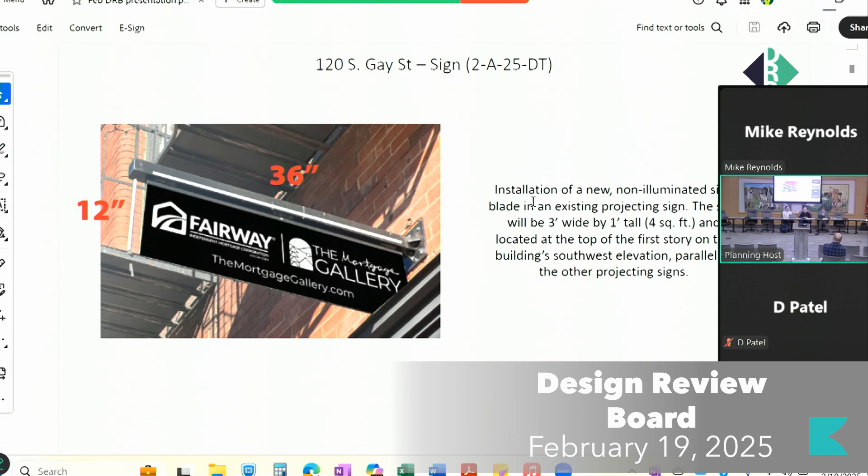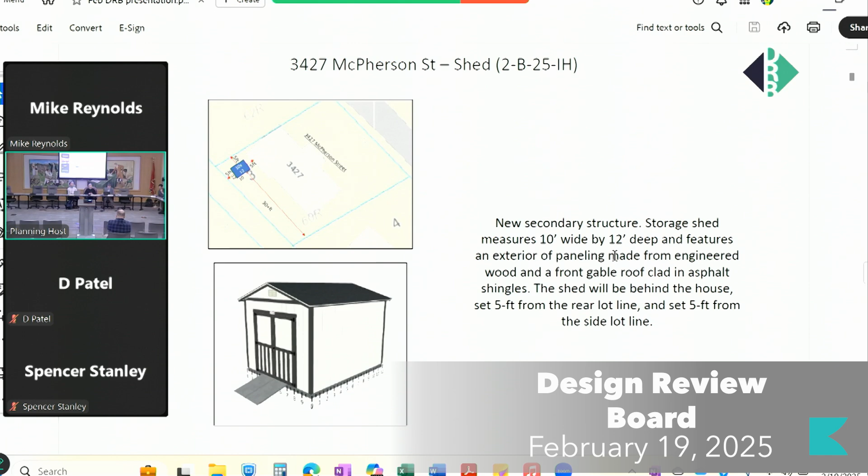The next one is infill housing at 3427 McPherson Street. It's a new secondary structure, a storage shed, 10 feet wide, 12 feet deep. If anybody has any questions, I'll be happy to answer. It's to the rear of the house.

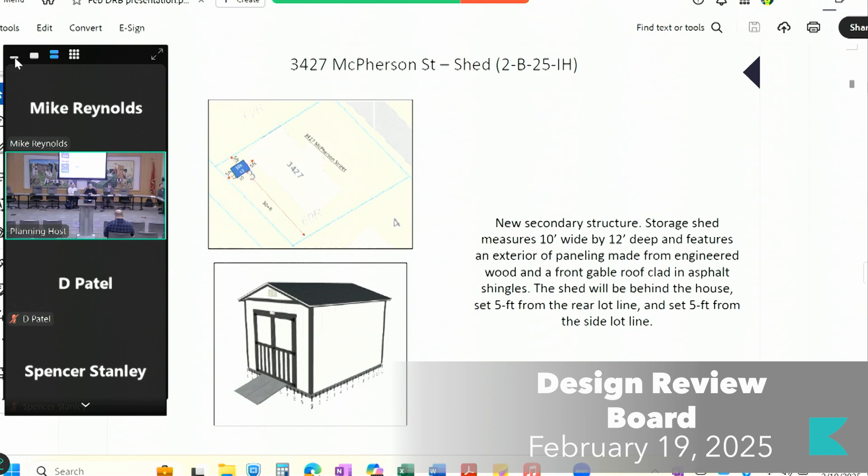And it's going in the wrong direction. My controls are not working well. Yeah, my computer is not responding at all, of course. Hold on. Yeah, I'm not getting... I apologize, my computer has frozen on me. And I don't have the other certificates written down. No.

I think we should just wait, because if we move on, we're going to get into the other projects pretty fast and want to look at them.

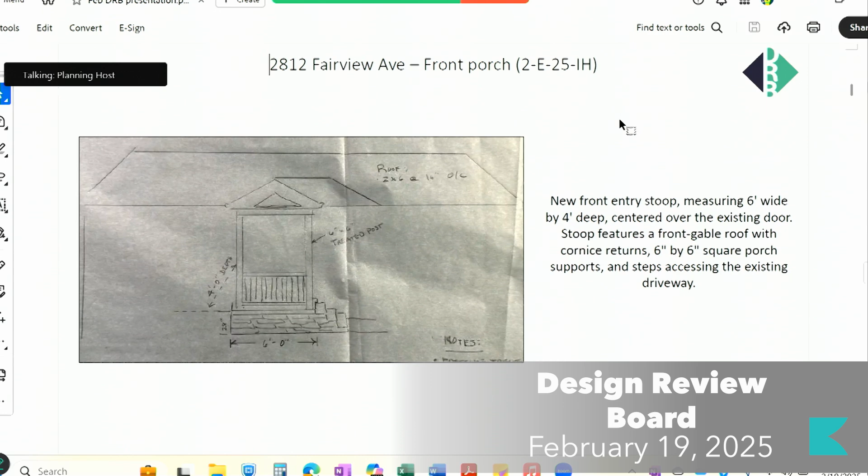2812 Fairview Avenue. It's a front porch addition. It's a new entry stoop measuring 6 feet wide, 4 feet deep, centered over the existing door. Has a gabled roof and 6x6 square porch supports, steps accessing from the existing driveway. Okay, that's it for the staff report.

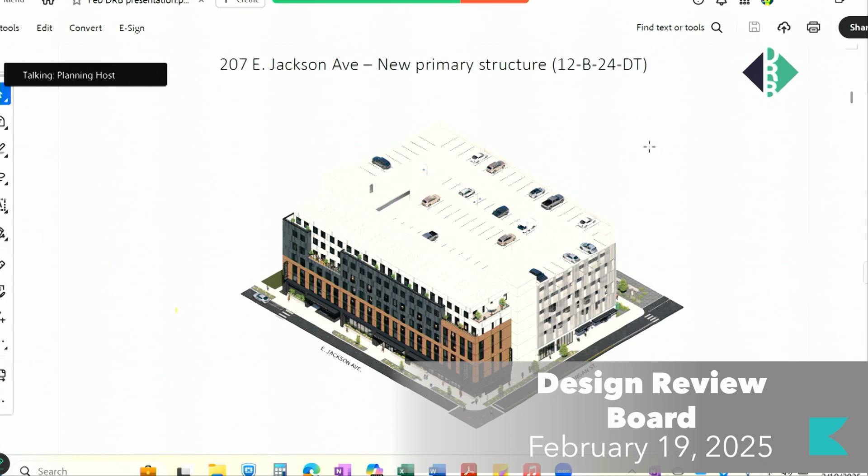All right, thank you. Next up we have certificates of appropriateness for downtown. The first project is 207 East Jackson Avenue, which is case number 12B24DT.

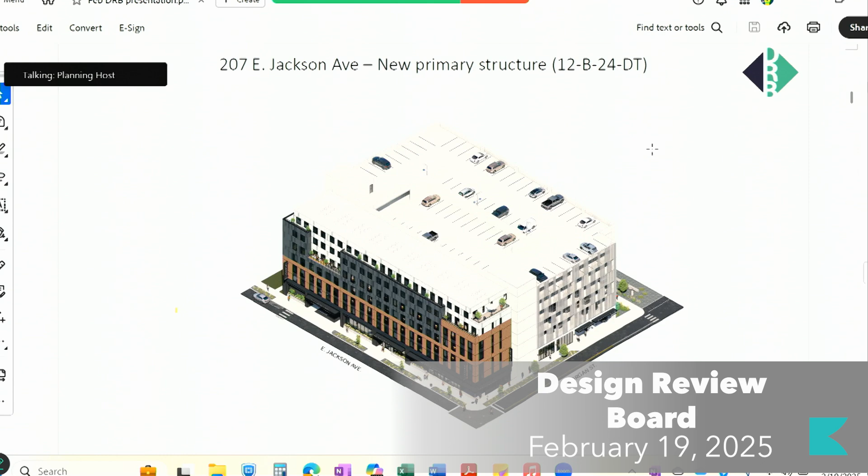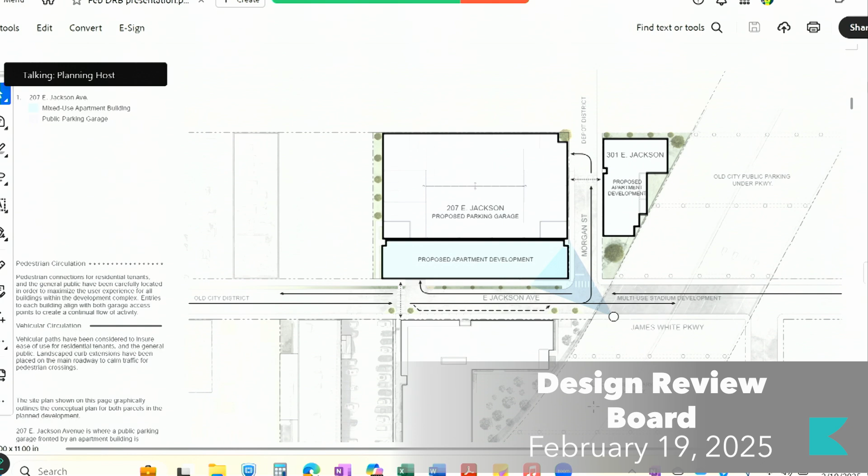All right, I'll try to summarize this pretty quick because it is a big project and we've already been through a workshop, so most people should be familiar with it. This is a proposed new 7-story mixed-use building, 6 stories of residential above 1 story of commercial uses, and also a proposed 7-story board-form concrete structured parking garage. So it is a mixed-use structure with the liner use of residential and commercial along Jackson Avenue. It does have garage access to both Jackson Avenue and Morgan Street, which is a side street. There's 2 pedestrian entrances to the ground level retail space on Jackson Avenue, a second retail access to the Morgan Street elevation, and a residential lobby on Morgan Street as well. The secondary access to the parking garage is to the rear elevation. I don't know why it keeps going backwards on me.

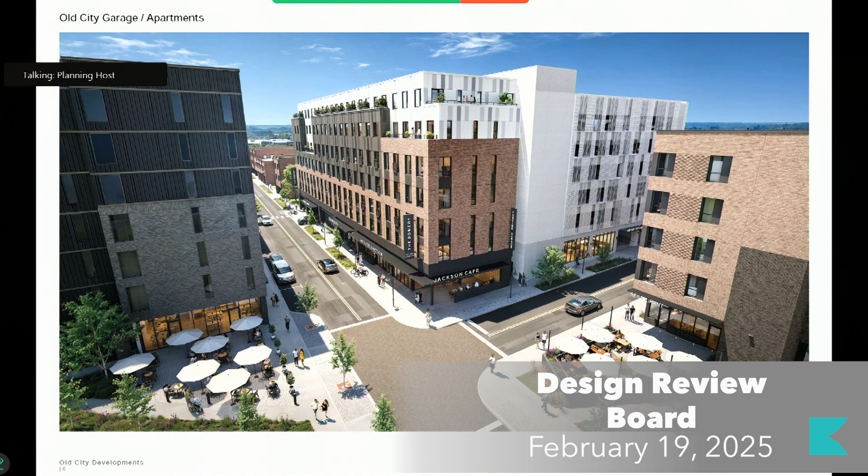Design guideline recommendations talk about parking, consolidating curb cuts, and locating driveways near mid-block when necessary to prioritize pedestrian safety. They recommend locating parking garages under structures or providing retail, residential, or other office uses to line the garage, and avoiding blank walls.

On massing and scale, they recommend maintaining a pedestrian scaled environment from block to block, along with dividing buildings into modules. Guidelines encourage incorporating first floor uses that are open to pedestrians and draw in walk-in traffic.

Building materials should relate to the scale, durability, color, and texture of predominant building materials in the area. Mechanical equipment should be hidden. For signs, there's not enough information in this package to approve a sign plan, so that will have to come back at a later date. Any major modifications will have to come back to the board, as noted on the plans.

These are still kind of preliminary. So staff will flip through some of this imagery.

We can open it up for discussion, but staff recommendation is for the final site plan and parking garage to meet city engineering standards, final elevation drawings to meet relevant standards of the city zoning code, including Article 5.4, and for signage to return to DRB as a separate application.

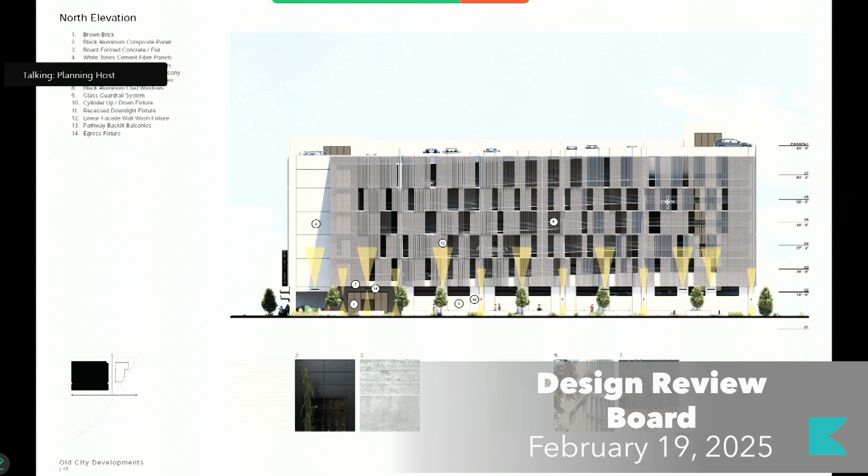Could we talk about the Morgan Street elevation? On the ground level there's a storefront, but in the plan it's not labeled as a use. What's that near the north of the stair tower going to be used for? Is that leftover retail space? Yes, it's intended to be retail space.

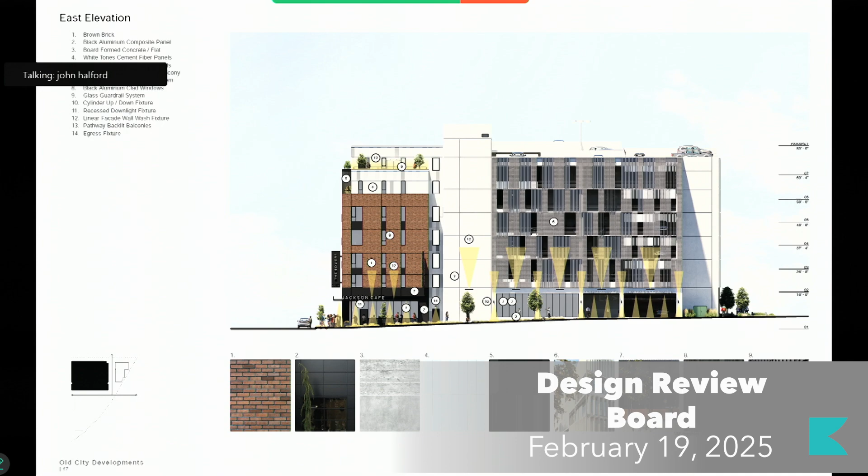Alternatively, it could be an amenity space for the residential, but our goal is for that to be public facing, so the highest and best use would be retail. If it were anything tenant facing, it would maybe be an amenity.

It could be like a bike shop that was used by the tenants, but also available for the public as a service. So the goal is for it to be public facing. That came in part through some of the comments we received from the workshop to work in more retail along Morgan Street.

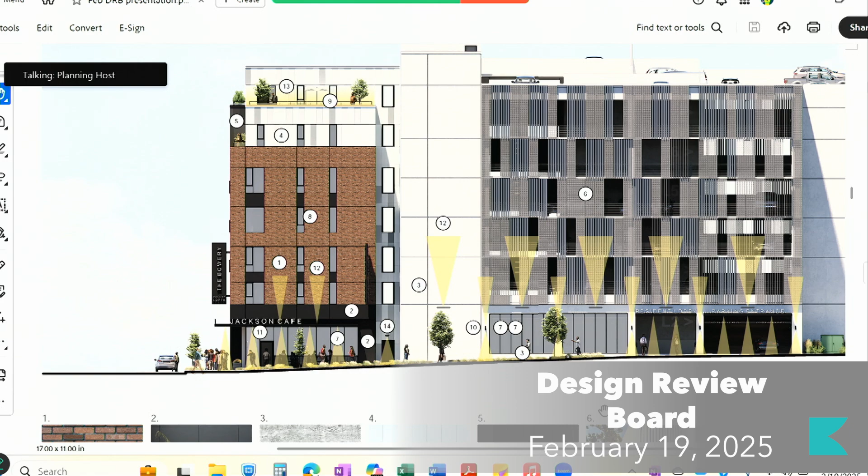I think going off of that same conversation, the blank wall of the stair tower coming down is listed as board form concrete, but then it says flat. Is this actually going to be board form with the texture of board form, or just regular blank concrete on that elevation? Our goal is to actually do a texture overlay on top of that, like a hand troweled finish, so that it can be a decent texture on that concrete face on that stair tower.

For the design, we thought that because these two building forms are relatively different, having that break visually kind of helps with the overall massing, so I think it's serving that purpose. But in terms of the actual material and finish, we want some texture to it, but otherwise it's going to be a natural concrete color.

Is there anything about our guidelines that says a blank wall is not allowed for that expanse? It talks about not having blank walls, but there's nothing explicit in the guidelines. The zoning ordinance has some blank wall standards. I'm not sure if this would apply. Article 5.5, Table 5.4 does mention all street-facing facades must not contain blank wall areas that exceed 35 feet. So that'd be out of the zoning code.

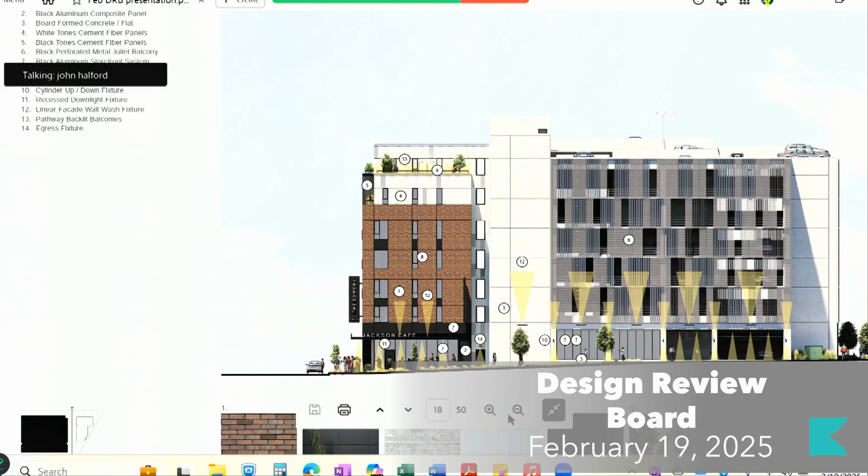Also, could you all explain the screening material on the garage portion a little bit more, like what it actually would be? There's a substructure to it that mounts modular screening systems. We've talked to some suppliers and manufacturers, including opening up discussions with local metal manufacturers that could pull this off. The goal is those modules would be made out of a handful of different panels, some being made out of fins, like louvers that could be rotated to create some openness and visual interest along the facade.

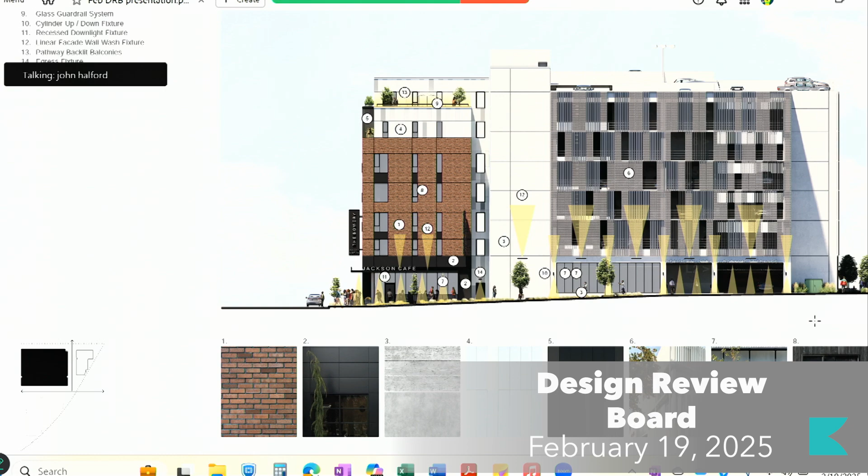If you're standing at the corner of Morgan and Jackson, we're creating views, some openness where we think it is a good texture and pattern on the facade from this vantage point. If you stand on the opposite side, that starts to change because the direction of the louvers changes based on where you're standing. There are also more simple perforated metal panels mixed into that, as well as some leave-outs to hit a few requirements we have—one was visual interest, and we also wanted to tie this into what we were doing on the Jackson facing facade on the south, on the upper levels.

But we are needing to meet our requirements to passively ventilate the garage, and so some of that openness is based on those calculations. Yeah, thank you, that makes sense. You don't want to have to introduce mechanical ventilation.

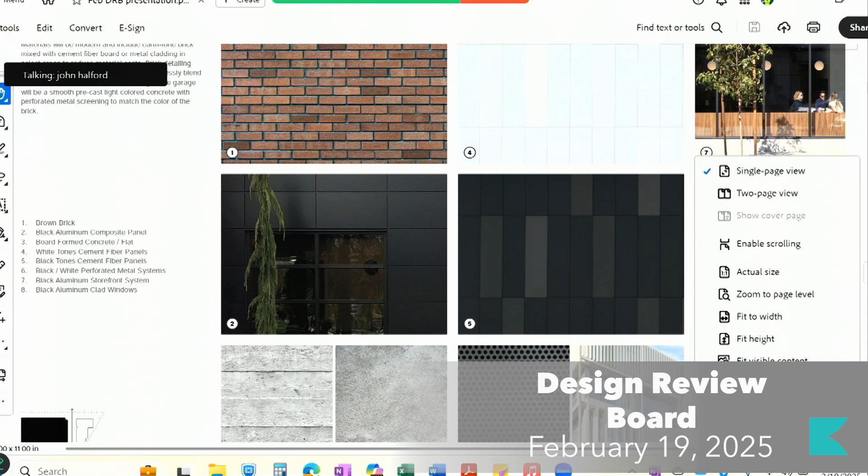I had a couple of comments on the Morgan Street side, with that space we're referring to next to the stair tower, toward the parking garage part. At one point I thought I'd heard that was going to be the residential lobby, and I heard it might be a residential amenity like bicycle parking or a shop that would serve the residential. I noticed on the plan it does not open to the street at all, that the doors to that space are interior to the parking garage, which when I heard residential service or lobby, made more sense in that regard.

Before it slips my mind, Rick had mentioned too about our parking lot screening, whether it should continue up to a parapet level so we don't see cars on the roof, realizing when you're standing on the ground looking up you may not see them. You have to get some distance back since we never really see a building in elevation. But that's a good point, you might want to continue your parking screening up a little to obscure vehicles parked along the edge on the roof. Anyway, my primary comment was about that corner space down there off of the parking garage.

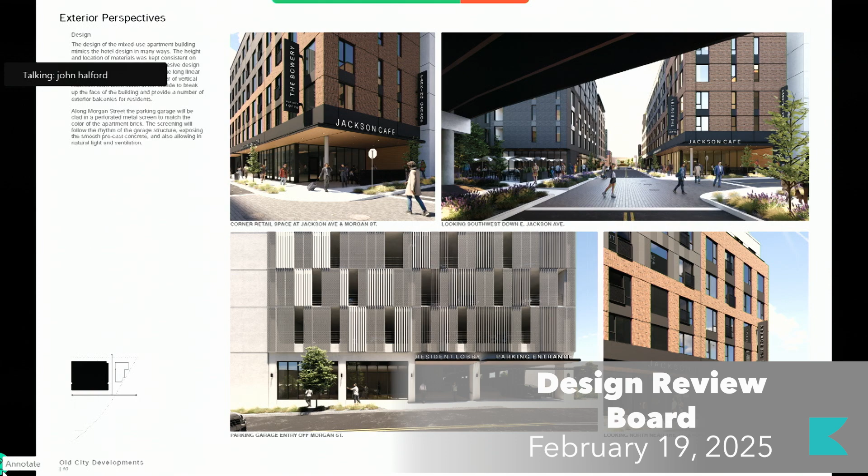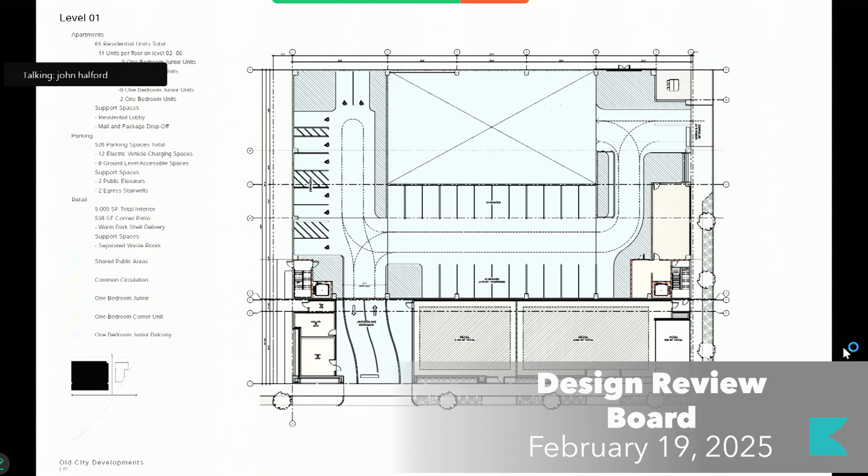If you look at the plan on the ground floor, that retail space, plan north of that, there's a hatched area, about 18 feet or so. That is actually the primary pedestrian exit from the garage, and we're trying to funnel people to a couple of locations. They can go down the stairs and kind of cheat to get out to the intersection more quickly. But because of the grade change along Morgan, it's most efficient for everyone to move with the fewest number of steps. So we're putting people out there. That actually is not an insignificant public entry at the northeast corner of that, quote unquote, retail space.

Again, we don't know exactly how it's going to be programmed at this time. It could be a public use, but also amenity use, but there is public access. If you look just plan north, those are just a few steps that access off to the Morgan Street sidewalk, and then that grade slopes down towards the intersection of Morgan and East Jackson.

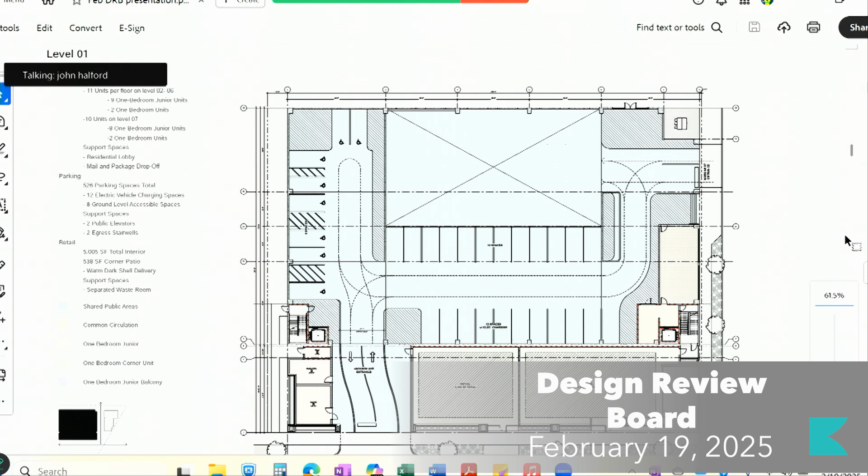In terms of the elevation and the height, we'd certainly be open to conversation and input. I think for us, we were mainly looking at that height from the ground, and you can see in those renderings you're not going to be able to see the cars, but we were also working on striking a datum. You can see that aligns with some of the score joints in our elevation, so we were pulling from that. That said, if that's something the design review board feels strongly about, we can certainly explore pushing that up to provide further screening, or to provide sightline studies to show there won't be any views to cars parked on the rooftop.

Just going to apologize real quick, my computer is acting up again, so hopefully I'll get it back up in a moment.

I wanted to close the loop on that comment from Perry. Just to confirm, that retail, quote unquote, as you said, is never going to have out-facing doors to the street because the grade change doesn't allow on-grade access. It'll have to have the stair set adjacent to it. Judging from the hesitancy when you explain it, it's not going to be retail, it'll be an amenity space for the tenants. I guess really the spirit of it is they're trying to have activity on the street and eyes on the street on those sections, and not just long expanses of non-activity.

So that's why we keep asking about it. I know because of that, no one will want to go to it, it's really just not going to have action on that side. So that's the reason why we keep bringing that up. So just to make that into a question, that face will never have storefront doors opening to the exterior?

On this side of the street, the storefront doors opening to the exterior open into a large 20-foot by 20-foot covered area accessible immediately off of Morgan. So as long as we're on the same page that it's very publicly accessible from Morgan, then yes.

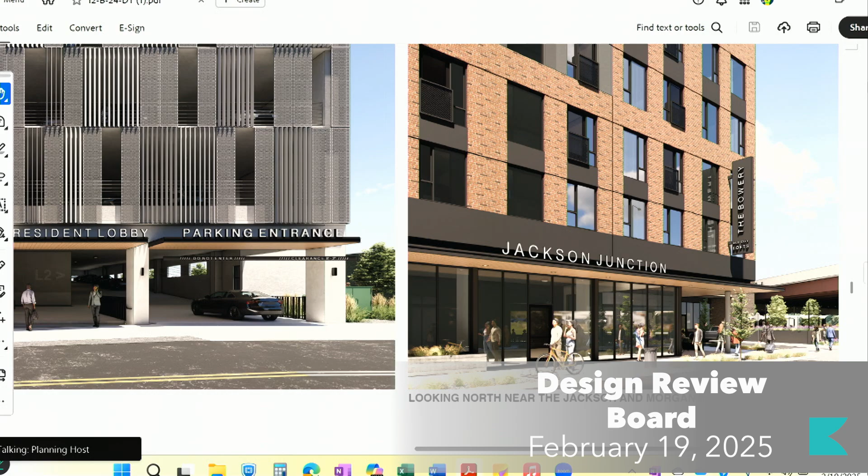Yeah, I guess now that I'm really understanding that material, I wish there was one less material on that facade, because the base of metal, brick, fiber cement one color, fiber cement another color - I think the 2/3, 1/3 proportion with the base being heavier with the brick may have been okay.

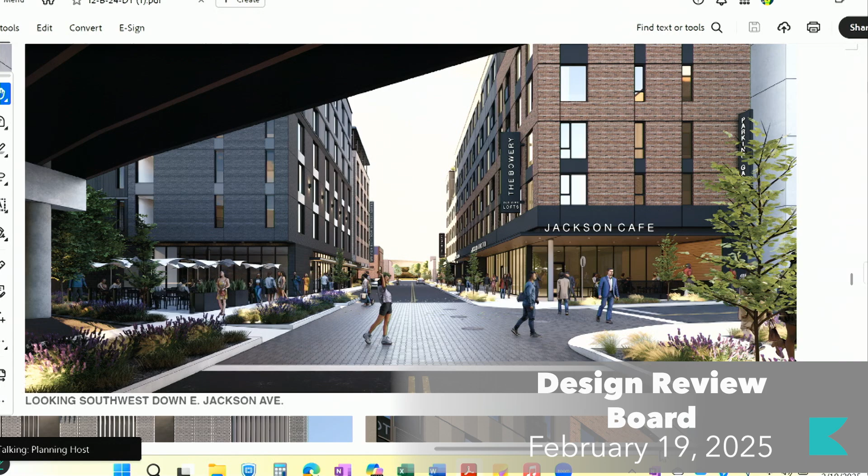I understand it doesn't have full brick going to the ground because it'd be broken up by the glazing, but the scale of that band from the top of the awning to the underside of the glazing, that strip of ACM is really thick and seems out of scale proportion. I know what it is - it's the same gap that's floor to floor. It's determined by that. I think it would be better served to be thinner, with more brick coming down, because that head of metal above the awning is just really big, and I think it's complicating the facade a little bit too much.

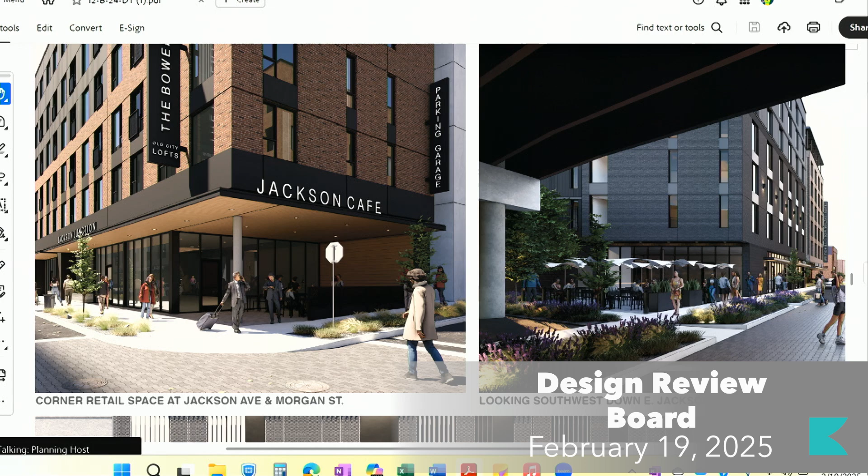I have a little bit of concern that if it gets too much thinner it'll look kind of weak, because there's that banding that happens at the other floor-to-floor levels horizontally, and if it becomes too thin... Maybe I want it to be so thin that it'll just go away. So that's a different thing - it was a facetious endeavor.

Last thing, I do agree also with Tony. I understand your concern about the buildup of dirt on these ledges if you have too many pushes and pulls, but the material transitions are extremely important, because it'll look really flat between them if not done well. I appreciate Tony's comment about maybe a row lock at the top of the brick - I don't want a traditional row lock, but something that breaks up that striation of material with good detailing so it doesn't read as flat, just like the reveals and detailing at the fiber cement.

Okay, sorry, I dropped out for a second. I was about to say - I feel like his lack of response might mean that his connection ended. Yeah, no, I was... through my computer. No, I'm kidding.

So I think I picked up everything that was stated. We were just talking about row lock or brick detailing at the top of the brick - that's what we were really talking about, just all of the material transitions. You said it was a design intent to make them coplanar.

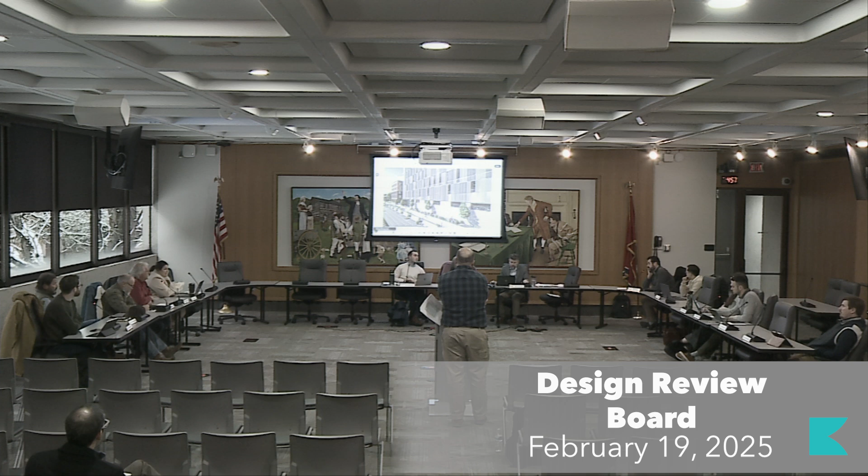The sidewalk is not on our site. That's right of way, so it'd be some sort of city project. Well, but the building would then have to react to it in a proper way.

Is that a known condition, or is that still in flux right now? Yeah, I don't have any information on that right now. Do we know if the railroad has an easement, or does the railroad own that land? It's shown as right of way, so it should be railroad property. I guess what I mean is, does the railroad have an easement, or does the railroad own that property?

Usually the right-of-way is owned by the railway, typically. Well, there's a lot of laws that govern how that works. I'm just curious, because if the railroad has an easement, it'll have a very hard time putting a sidewalk there. If it owns the land, then they can put a sidewalk there. Even if they cooperate with the city, federal law doesn't allow them to just modify the use of that land.

My general impression is we weren't necessarily approving the sidewalk on Jackson either, that it's a response to future public improvement. So if the city's pushing for a greenway along the railroad right of way, that may or may not happen. I don't know that that's part of what we'd be approving today.

I guess what I'm saying is the back should be approved contingent that the sidewalk is not there.

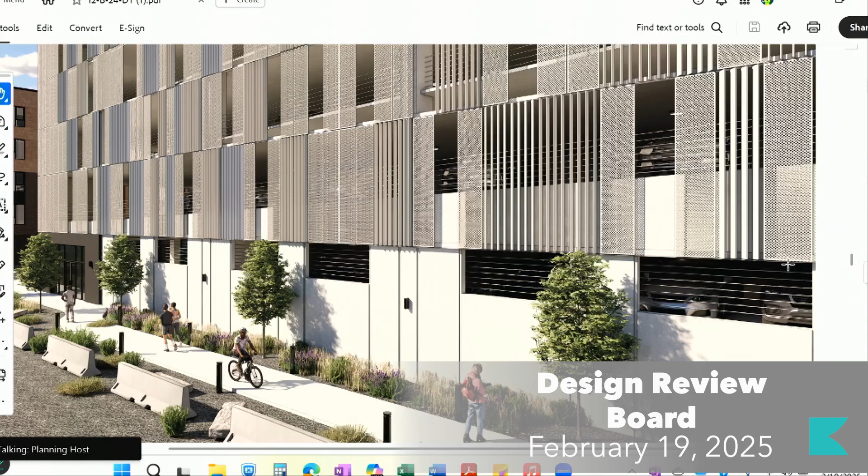Did we, if I could, I was just going to ask, in our discussion we talked about the screening at the very top, kind of extending that to the garage. Would we include that as well? I think the offer was that they could do some site studies to see what the sight lines are, and if that shows that the cars are visible, then extend it.

If I could make two suggestions. The first being, Mark mentioned earlier that one of the conditions had the wrong section of the code cited, so that would need to be revised to say 5.5. I believe it's condition number 2.

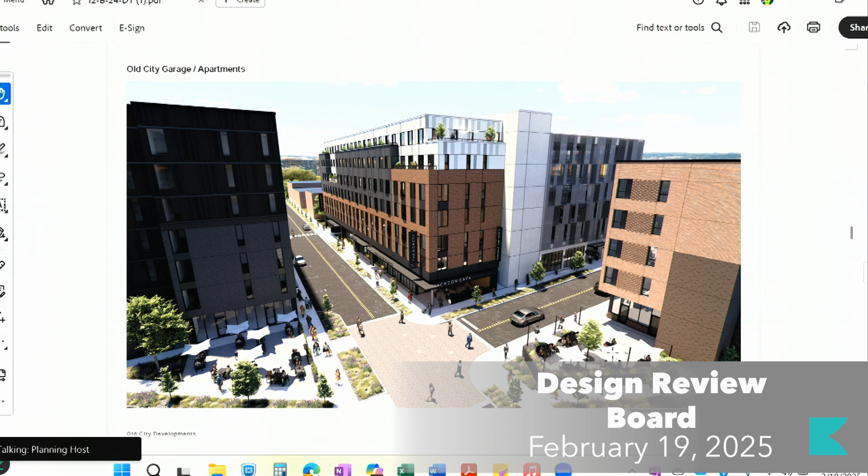Also, Christina, if you're still there, you could chime in on this possibly, but Perry, I don't believe your motion is sufficiently explicit on what you want seen. As I'm recording the minutes, I don't think that's something I could put into words that can be enforced, just referencing the conversation that was had here. I think we would need more explicit guidelines on what you all want to see in that condition.

Would you like to rephrase your motion? Well, trying to recap an hour's worth of reglets and flashings and materials, I would restate the motion to be approved as presented, per staff recommendations, correcting the code reference, adding the screening for the transformer, and assuring that these are flush panels and no battens as discussed.

I think that reflects the majority of the discussion. Mike, is that clear enough?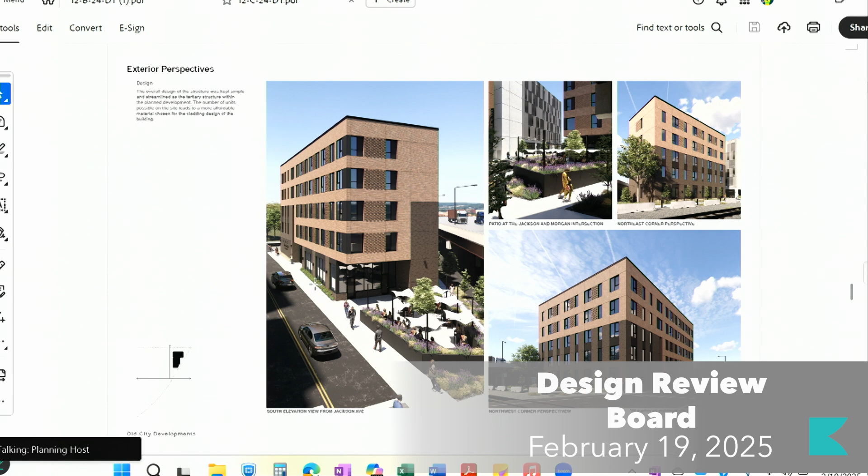So this is across the street, across Morgan Street. It is a triangular shaped lot. They obtained a few variances that are pretty tough to meet on a site of this shape. They have a plaza on the Jackson Avenue side of the property, and the retail is set back as well as the rest of the building, set back from Jackson Avenue. It has one entrance from Morgan, and I believe two entrances from the plaza or patio area. It's a 5-story building with residential on the upper floors. It does have retail and some residential on the ground floor.

Staff recommendation is to approve, subject to the following conditions: final elevations, drawings, and site plan to meet relevant standards of the city engineering and zoning code, and signage to return to the DRB for separate application.

Thank you. Is the applicant present? Same representative and applicant. Great, thank you. Do you all have anything to add to Mike's comments? No, we don't. We can go ahead and move on to discussion. Okay, let's open it up to the board for discussion.

One question, is that lower darker portion a deep red or a brown? It is a darker brown. It's not black. Thank you.

I want to say that I like the texture and the patterning on this building. I think that it strikes a really good balance between modern and some of the other historic context in the area, so I feel like that is a good move. But related to the detailing discussion from last time, I feel like it's a little bit ambiguous and a little bit flat, so I'd like to talk more about how that's going to look in real life and how the texture is going to come through.

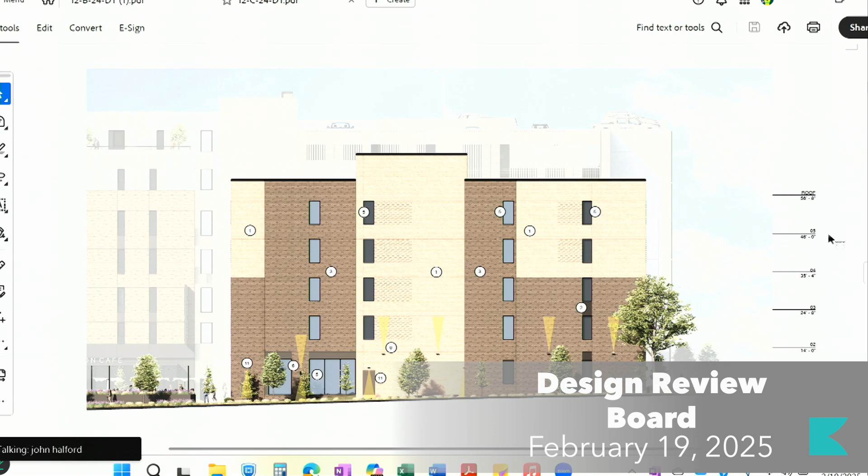Sure. So this building has a couple of jumps in its material change. We wanted to respond to the context of the interstate, James White Parkway, just immediately to the east of the building. These darker materials, because of it being an interstate, the things that you're going to be cleaning are in large part soot and other darker materials. So we jump that darker material up as it gets closer to the interstate to alleviate some of that maintenance. You can also see from the corner view as it gets to Morgan and Jackson, it just kind of hugs the massing of the building.

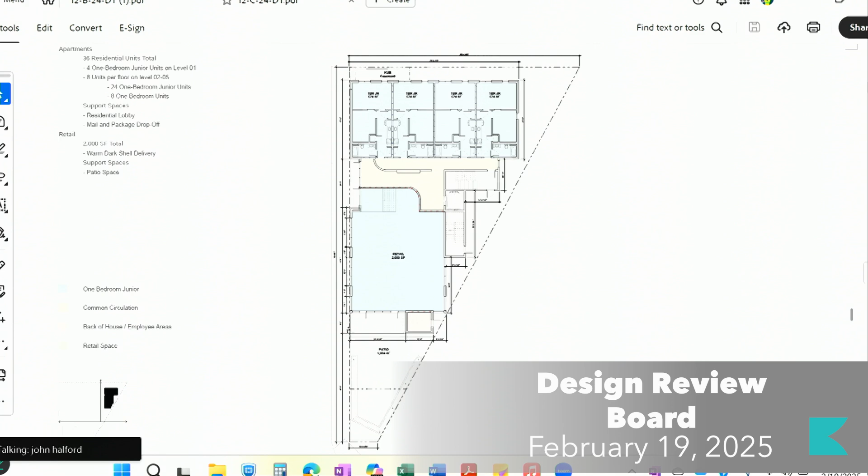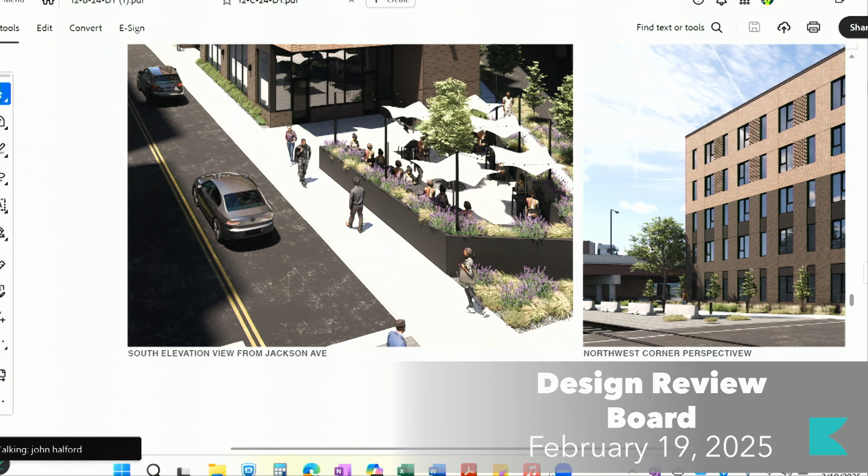In terms of the depth, there are a few main areas where we're creating depth in the facade. One is the retail entry and that connection to the patio or plaza space and into the retail. There's a lot of grade change, so that point is important in terms of accessibility, but it also gives us an opportunity to create an inset and a lot of depth that on the pedestrian level you'll really experience. It also gives us a way to accentuate this darker brick material and its separation from the lighter brick material. We're showing black or dark bronze aluminum storefront, as well as that dark brown brick, and brake metal panel to match the storefront texture.

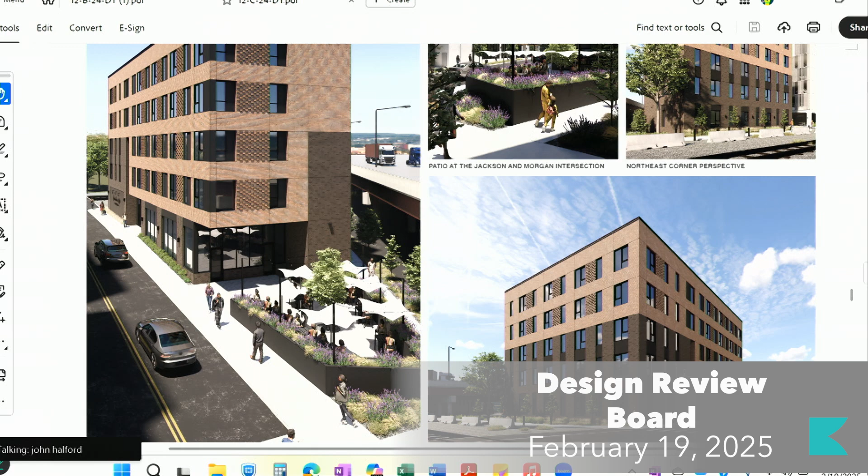As you get further up onto Morgan, there's an inset that happens. That's the retail entry and a secondary access for the retail space, kind of back access for the retail space as well. So that creates a good deal of depth. We actually extended that cut up to the third level, and that helps to break apart the lighter colored brick from the darker colored brick there.

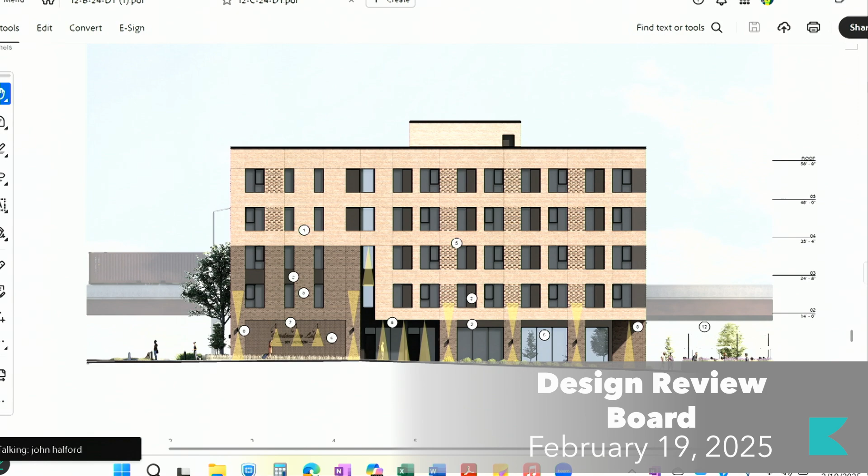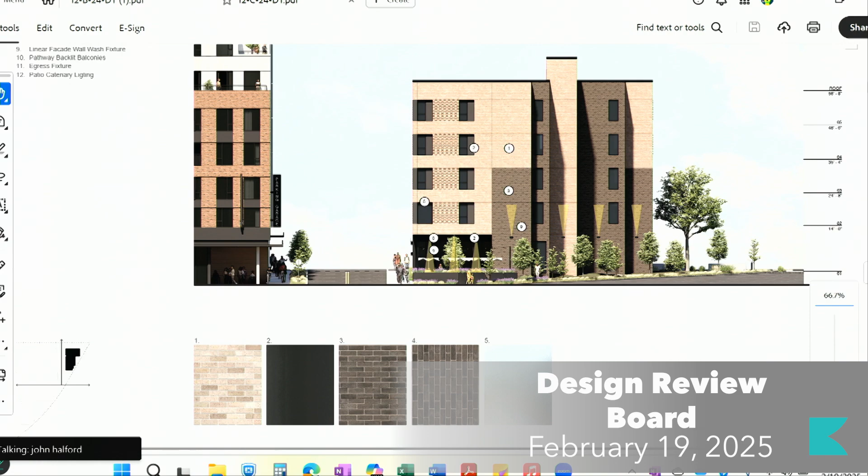Generally with the windows and how we're dealing with the fenestration, not only do we have this brick detailing that is connecting the windows, but also because it's a brick building, we're setting these windows back similarly to how we did 207 to create some depth. As you rotate around the building to the north side, we really tried to accentuate those openings to create those taller verticals to again separate the language between the darker brick and the lighter brick. There will be a steel lintel at the top of that dark brick to again further accentuate that break of materials.

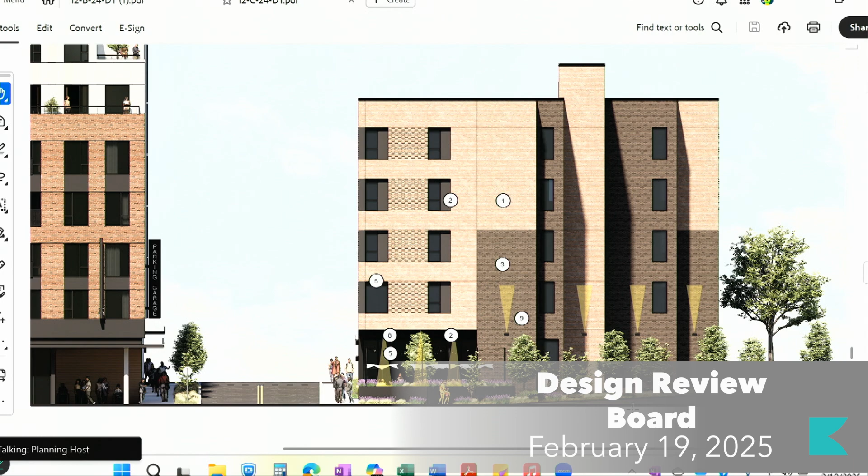In terms of them being planar, that was a design and maintenance decision that we made. It's something that is more contemporary detailing, where you have two materials that are, whether they're similar or not, coplanar to minimize water buildup or water intrusion, and also dirt and other things that would create maintenance issues or would be potentially unsightly. So those are flush and aligned, and for us that was intentional. We locate our control joints and lintels and work with other elements to create that depth that you can see here as presented.

Thank you for that explanation, and I appreciate your thoughtfulness around maintenance and how the building's going to patina in its context, so that's very appreciated. I also wanted to talk about the infill brick patterns between the windows on the lighter colored brick areas. Had you considered letting that be a vertical element rather than individual rectangles? There's a little bit of a pancaking effect happening at that floor level, and I just wondered if you had explored that.

Oh, I see what you're saying. Connecting the windows vertically instead of horizontally. Well, connecting the specialty brick pattern right there, with each other as a vertical element rather than starting and stopping at each floor. I see, instead of having that banding.

Yes, we did explore that, and to be honest, we didn't love it. The horizontality of the lighter colored brick massing does contrast, even though it's really important to maintain the regulating lines in the project. We do have a contrast between the vertical language of the darker brick and the horizontal language of the lighter colored brick. So while we did explore connecting that brick pattern vertically, when we looked at that, we felt like it looked weird and it started to not create a distinct language between these two forms that we felt was important for the parti of the design.

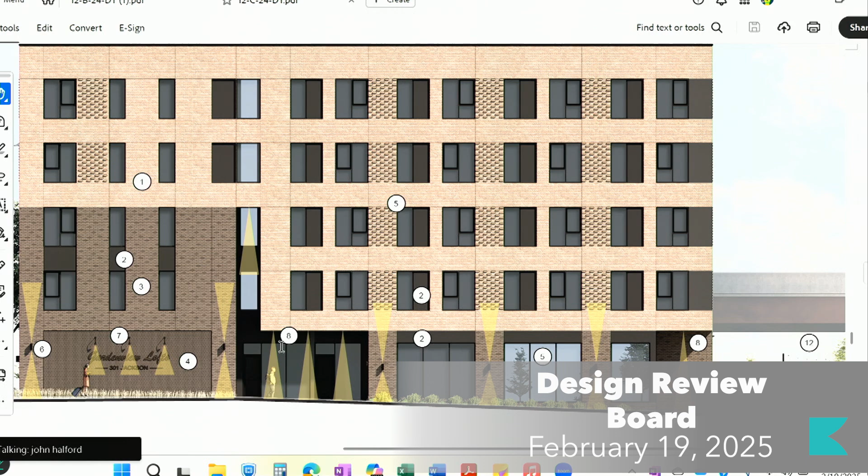Yes. So on the sides, we're keeping that same brick material, and at the top, we're doing sheet metal, so it'll match the finish of the storefront. So you really experience that kind of cut through, or the carve out, so to speak. So when you carve out the building, you get the storefront, the black storefront material.

I see, so the storefront material will wrap up and into the horizontal. Correct, and become the soffit. Got it, thanks.

But just as a matter of detailing the front face of it, the brick will come down and then it'll turn, so you'll be able to experience also that full brick depth as well, which we think would be a nice detail. If you were standing in that crevice and looking up, you would be able to see the full brick width and then a reveal and then a black metal soffit. Got it, that sounds elegant.

I would personally like to include that in any motion for that to be the case, since it's not explicit here.

You mentioned earlier adhering to the parti of the project, and I think this would have been a really good candidate for a diagram showing what the parti is as far as the differentiation between the light and brown brick. I think if what you're going for is maintenance and durability, so they're coplanar and it has a very flat facade in that regard, except for the scoop at the entry, it has to have some consistency and rigor to where the darker brick breaks that vertical plane going up. It's very haphazard right now, and I don't really see consistency or proportionality as I scroll through it.

So the two-bay, two-story facade is more narrow than other houses on the street by at least 7 to 10 feet. It is taller than the context, which is mostly one-story houses. The full length of the porch is 6 feet deep. The recommendation is to have at least an 8-foot porch depth.

At least one window should be added to the side elevation here on the front portion of the house, either on the first floor or second floor. So that pretty much covers the staff recommendation, which is that the board should discuss the width and scale of the house in the neighborhood context.

If determined appropriate by the board, conditions of approval should include: parking to be revised to meet the design guidelines with final site approval by city engineering, front porch increased to 8-foot depth, additional window added to the left side elevation, and the right side window revised to a double hung window. Final construction should retain details shown in the drawing, and the final site plan should include new native or naturalized trees in front and rear yards, or existing mature trees on the lot should be preserved.

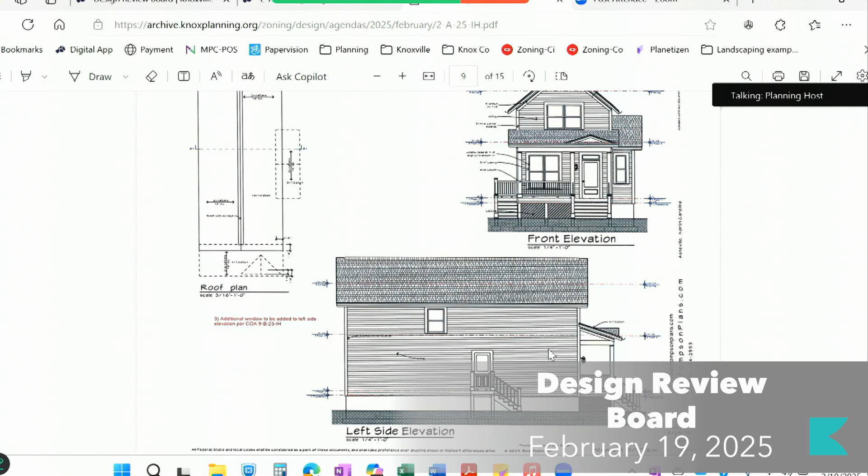Thank you for that, Mike. Well, is the applicant present on Zoom? No, he's not. Okay, well then we'll open it up to

discussion by the board, particularly related to the scale, which was mentioned in the report. Would there be any way to pull up a street view, if it doesn't break your computer? No promises.

This is the lot here. There's not a whole lot around it.

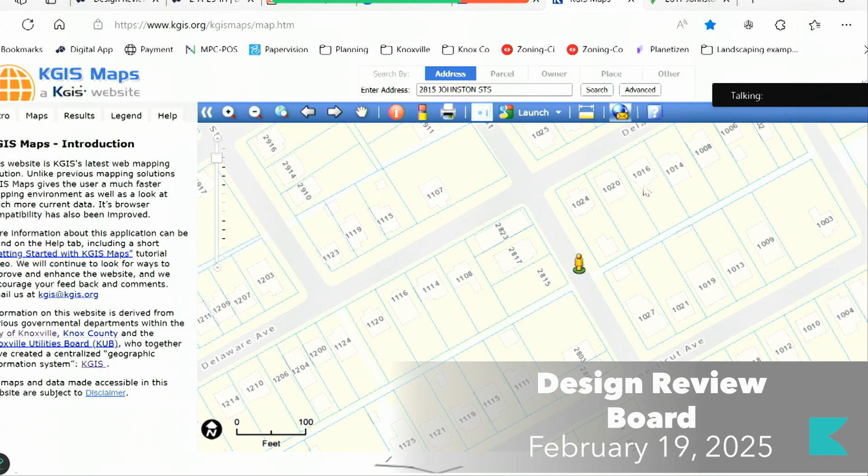Which one's the lot? It's just beyond this white house here. It's this vacant lot here adjacent to the alley. So this lot here. Oops, did not mean to do that.

It's like it's trying to be a shotgun house, or what they call a camelback, whenever you put the upper floor on it, because it's 16 feet wide, but it has that little protrusion that if they just made it as wide as the extra appendage they put on it, it would be comparable to the width of the other homes, I believe.

It's hard to ask them to just make it wider for wider's sake for the proportion, because that's adding a lot of square footage to the building. They may just like the efficiency of it being smaller, or narrower.

I think given the context, it's not a problem that it is not exactly like everything else around it. I agree. I mean, the variation, I think, is welcome and not inappropriate.

How wide is the lot that it's on? I can't recall exactly — 50 feet, 50.8 feet. Okay, so it's a typical lot.

Yeah, you end up with about 11.3 feet on the north side of the house and 19.2 feet on the south side of the house. It's fairly significant setbacks.

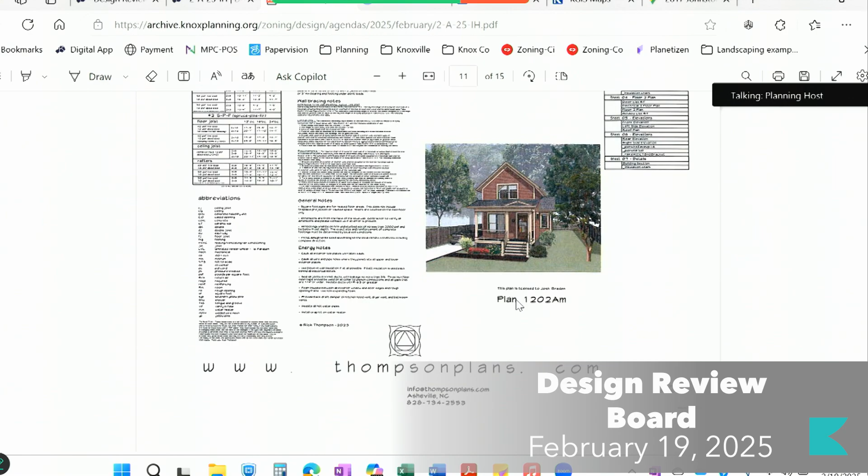Sorry, I was just going to clarify one thing that I said. In the site layout, it shows the parking pad coming off the alley, so it doesn't have a long driveway from the front.

Sorry, go ahead. Mike, can you clarify what the staff recommendation is for the lot? Is it that it slide back past the front face of the house, for the parking area? Let me see exactly what it says.

So the guidelines — this is an odd arrangement, okay? Typically you would have, if the lot has an alley, parking to the rear, coming from the back side of the property instead of from the side. Otherwise, if there's not an alley, then you're coming from the front. So the staff recommendation is kind of using the front access standards as a basis for the recommendation.

So with front access, you would have a skinny driveway going to the house, and as soon as it hits the house, it can widen out, but it has to be 20 feet deep, so that the parking area is really behind, or at least to the side of the house. Here, the parking pad essentially extends beyond the front habitable portion of the house and extends out to the edge of the front porch.

So really, it's not meeting the intent. If this was coming from the front, we would require the skinny driveway to continue all the way to the habitable portion of the house and then extend back. So we really need to push that back.

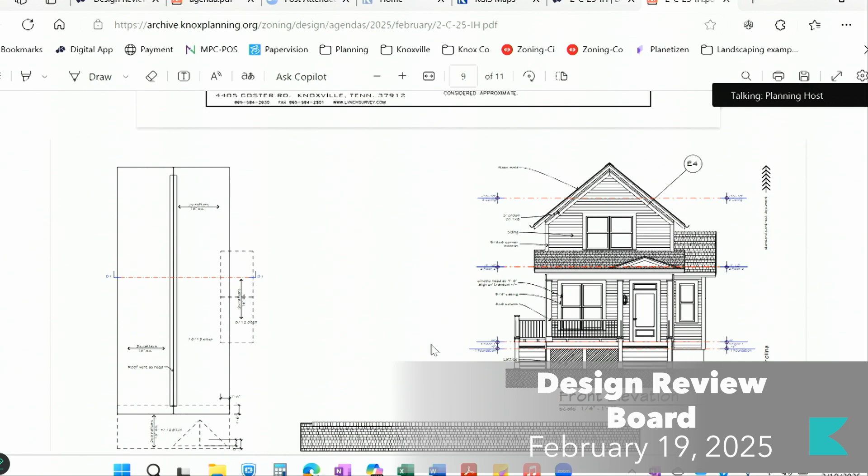I was looking at the site plan real fast. I didn't see where the parking was. It looks like it comes off.

Okay, yeah, the parking is accessed from the front of the street, which goes against design guidelines, which require parking to be accessed from the alley if there is one. Thank you.

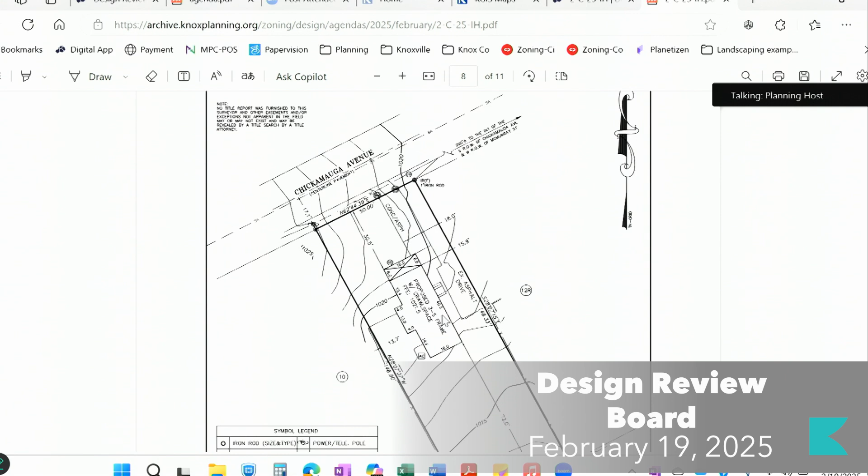The recommendation is for the board to discuss the width and scale of the house in the neighborhood context. If determined to be appropriate, conditions should be included: one, the parking to be revised to meet the design guidelines, with final site plan meeting city engineering standards.

Front porch to be increased to 8-foot depth. Additional window to be added to the left side elevation, and the right side window revised to a double hung window. Number 4, final construction to retain details shown in the drawing, and final site plan should include native and/or naturalized trees in the front and rear yards.

And I can bring up street view again if needed. I think it would be helpful to have street view.

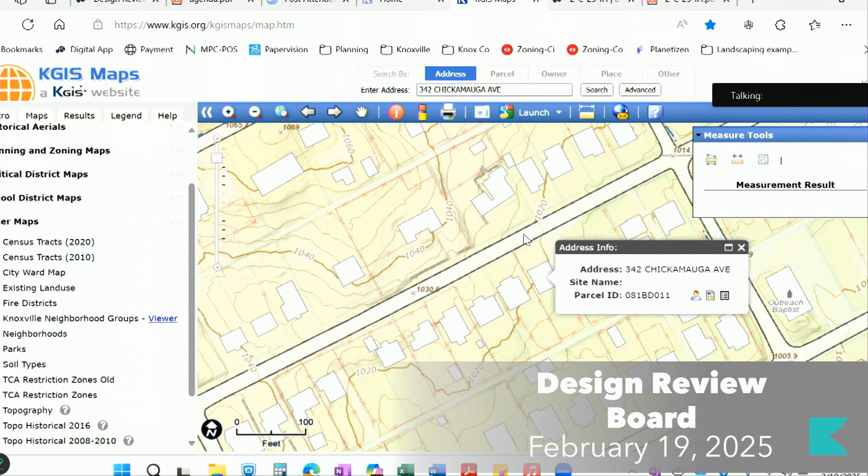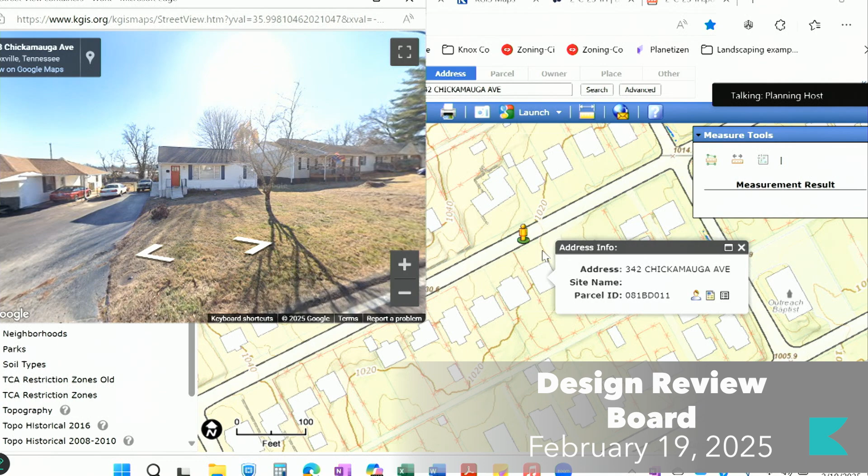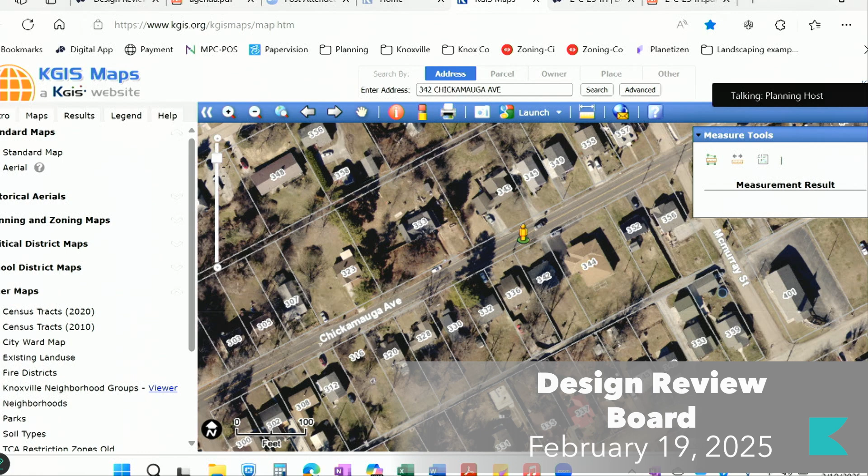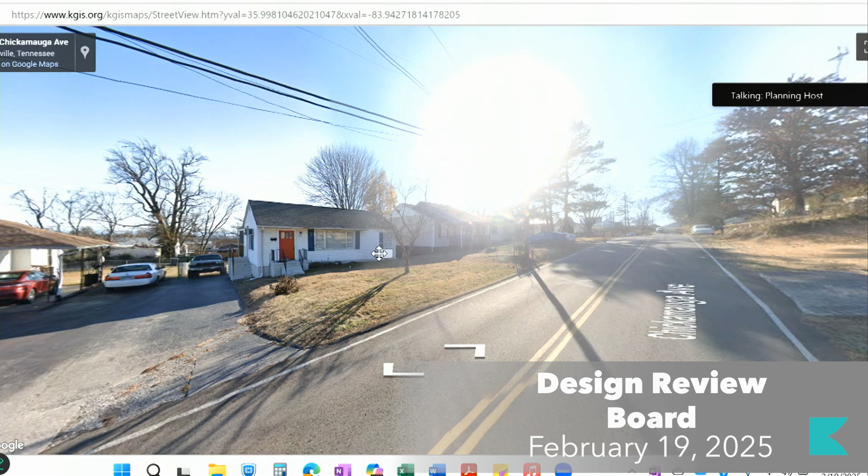In this situation, the houses around it are significantly wider, generally cross gable, nothing two-story or even dormered on the street. I see why they did the driveway off the street, because the existing house's driveway comes off the street, but it does have a viable alley for the parking to come off the back. But unlike the Lonsdale one, I think the scale is an issue here, both in its width and its height.

Without the applicant being here, do you want to have further discussion, or would you rather postpone or even not approve it based on those comments?

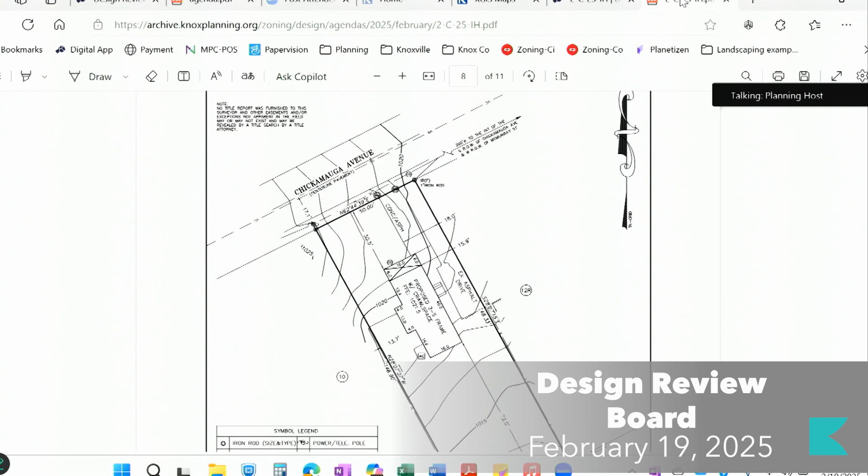I don't know that this one can be salvaged on this lot. I would move to deny. Second. We have a motion to deny and a second. All in favor? Aye. Any opposed? Okay, motion carries.

Moving on. As long as they come back with a substantial revision, then they can submit again. They can't come back with the same design within a year. Great, thanks.

We're going to move on to the next one, which is 2136 Apricot Avenue, case number 2F25IH.

I can just go through the staff report. If you need to do visuals on the screen, we can. I'll try to get it pulled up in a moment. We might not need to get that far. Why don't you do your report and then we'll decide.

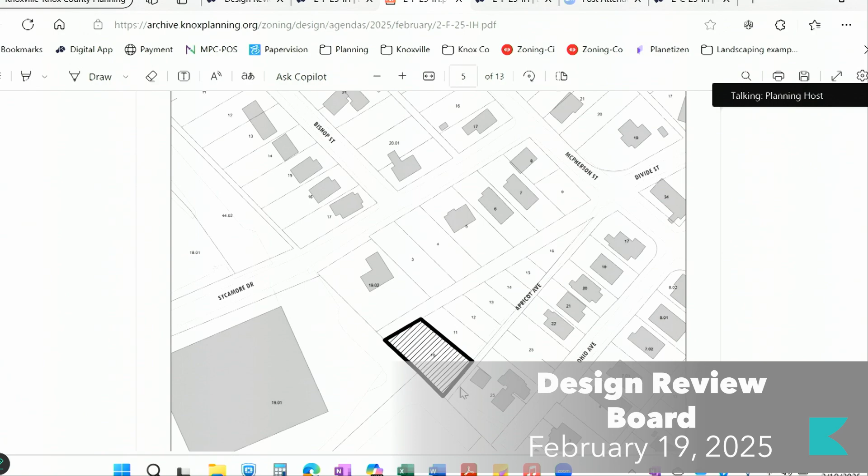Since the applicant is not here, we have the option to continue discussing this without answers to our questions, or we can move to postpone or deny. I motion to postpone this case, because there are questions.

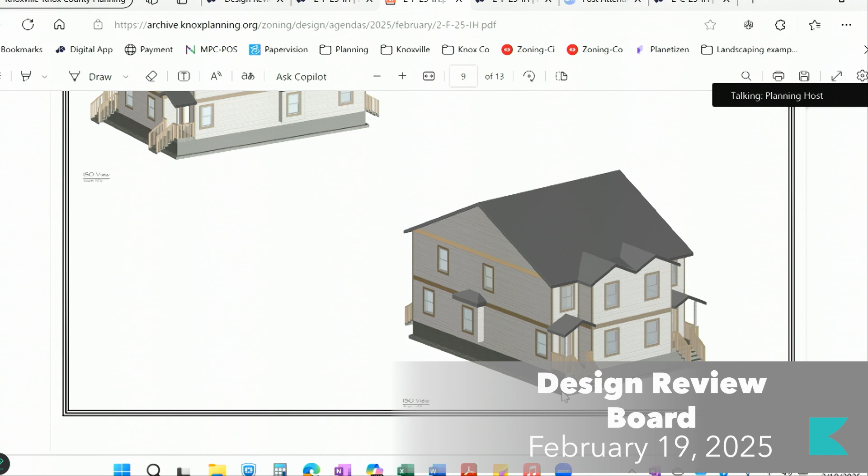I think we also need engineering here for this one, because Apricot is barely an alley. The pavement doesn't extend, there's no turnaround, so it's a dead end, which is generally not allowed even in alleys. The alley that's behind it is not there. And so there's just too many questions, so I will second Cameron's motion.

Could we get a specific date for the postponement as required by the admin rules? If you could just say a 30-day postponement, that should work. I motion to postpone for 30 days to the next design review board. Okay, we have a motion and a second to postpone for 30 days. All in favor? Aye. Any opposed? Okay, motion carries on that one.

I had a quick question about it, though. On those front porches, I know there's some different rules for townhouses versus row houses versus micro multifamily or whatever. Are those porches appropriate? We have that 6-foot requirement. Does that count for a duplex?

There's design standards, and I think it would apply regardless. They're guidelines, so they're not zoning standards, but it would still apply in this case—like the recommendation to have a deeper porch would still apply. Is that what you're asking? Yeah, because we've had some row houses and other multifamily approaches to this sort of thing.

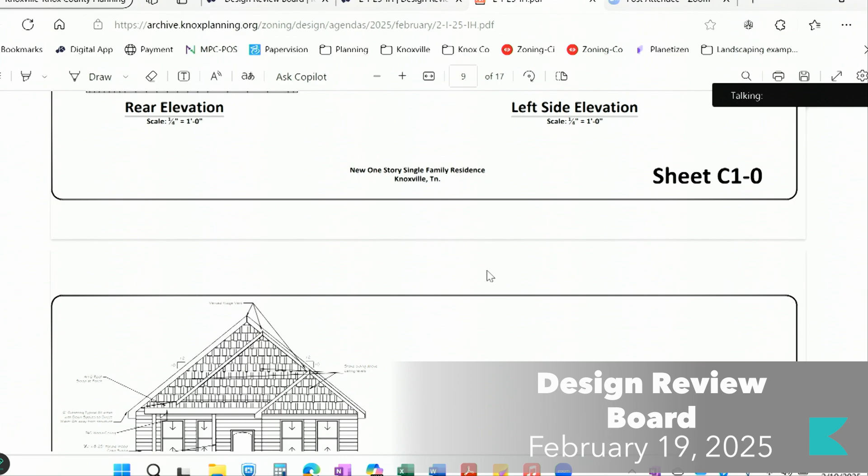Thank you for that. This is the same applicant, so we don't have anyone present for discussion. So let's have the board decide how we want to proceed.

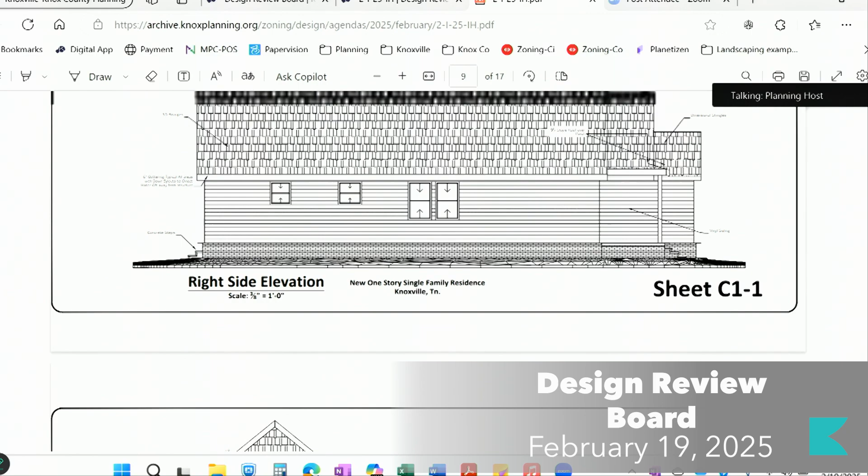This one has a lot of questions too, just with materiality—it says something about Hardie siding, but then it also says vinyl siding. I'd have questions about the floor plan too; you have to go outside into the screen porch to get to the water heater and furnace that's outside. It looks like some odd stuff has been added ad hoc, and the front elevation is, I don't think, acceptable. They're showing just 6x6 posts, so I'd want to ask: is it going to get clad or is it pressure treated?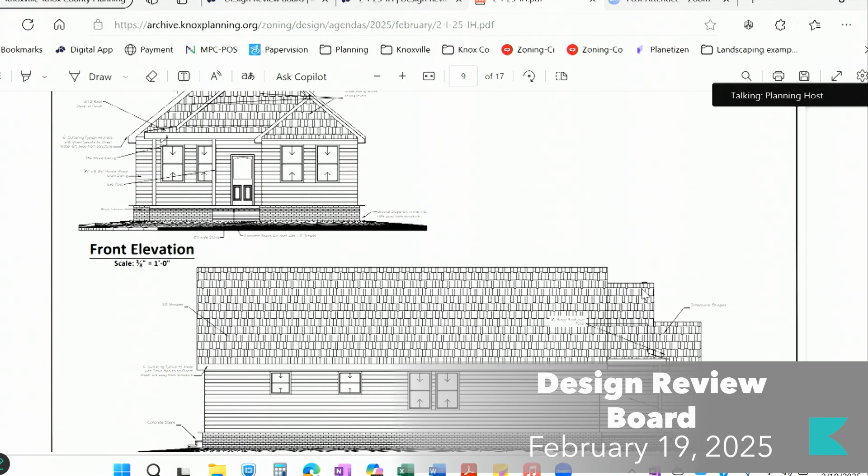There's no handrail shown to get up onto it, there's no guardrail. And the 10-12 roof pitch is honestly an odd proportion for the top. If they're going to do a 10-12 roof, they could have a 12-foot to 18-foot wide second floor—put somebody up there.

There's a great place for the stair just inside the front door. Of course, we're not the designers, unfortunately. Yeah, and disregarding the siding, you're correct—there is a different type of siding on the front than on the rest of the elevation. So that was the last staff recommendation, that they just pick one and go with it. Okay.

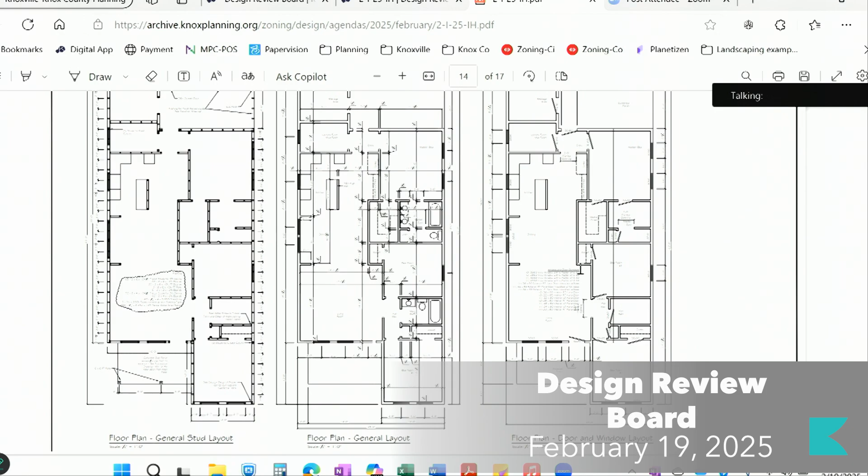Does anyone want to make a motion? I'd motion to postpone this as well, just so we can have the conversation about it, because I think a few questions and a quick discussion could get this where it needs to be, and then it could be approved. I appreciate it's got a brick base. There's things about it that are fine.

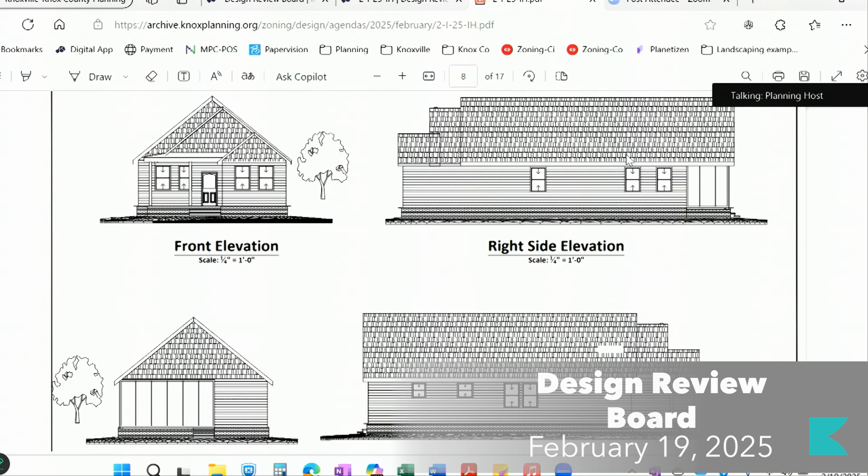I agree, I have a couple questions, so I'll second. Oh, you didn't finish your motion. Reminded me, for 30 days. Second. Okay, we have a motion to postpone for 30 days and a second. All in favor? Aye. Any opposed? Okay, motion carries.

Next up, we have 3 that are intentionally postponed. So I think what we can do is just read their case numbers and decide to vote on the postponement. Yep, is that right? Okay, so I'll just read all of these.

3343 Divide Street, case number 2D25IH. The next one is 3335 Divide Street, case number 2G25IH. And the last one is 3339 Divide Street, case number 2H25IH. I would like to make a motion to postpone per staff recommendation.

Can we have a motion? For 30 days. I second. Okay, we have a motion to postpone per staff recommendation, a postponement of 30 days, and a second. All in favor? Aye. Any opposed? Okay, that one carries. We have one more.

816 East Churchwell Avenue, case number 2J25IH. Is it a postponement? Well, staff is recommending postponement, but I don't think the applicant... oh, he is present, okay. I'll go through this. Okay, let me just go to the...

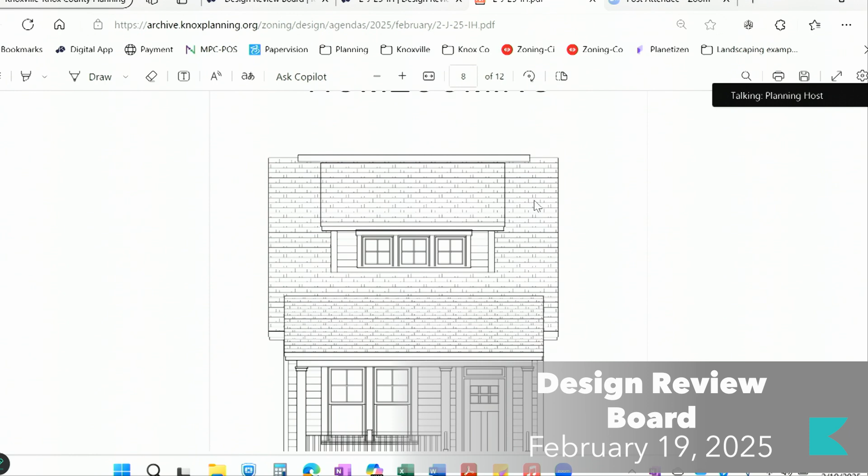Parking, I think, is that all right? Mm-hmm. Parking is an 11-foot wide by 22 feet deep diagonal concrete pad that is accessed from the alley, which meets design guidelines. The final site plan needs to meet city engineering standards. The 2-bay facade is significantly more narrow than the older houses on the street by at least 6 to 8 feet.

The height is of similar scale in the context. The house features a full-length 7-foot 4-inch deep porch recessed under a shed roof and supported by 3 six-inch square columns made from pressure-treated wood. The guidelines typically recommend porches of at least 8 feet deep. This porch is proportional to the house.

The 4/1 single hung windows and the quarter light door fit the context. All elevations feature a sufficient ratio of solid to void. The 7/12 pitch roof matches the neighborhood context, and the design features from the shed dormer, overhangs, eaves and trim, the asphalt shingles, lap siding, and stucco coated block foundation all meet the design guidelines.

The siding should be traditional clapboard style siding instead of a Dutch lap or flush panel siding. The final site plan should include one tree in the front and backyards.

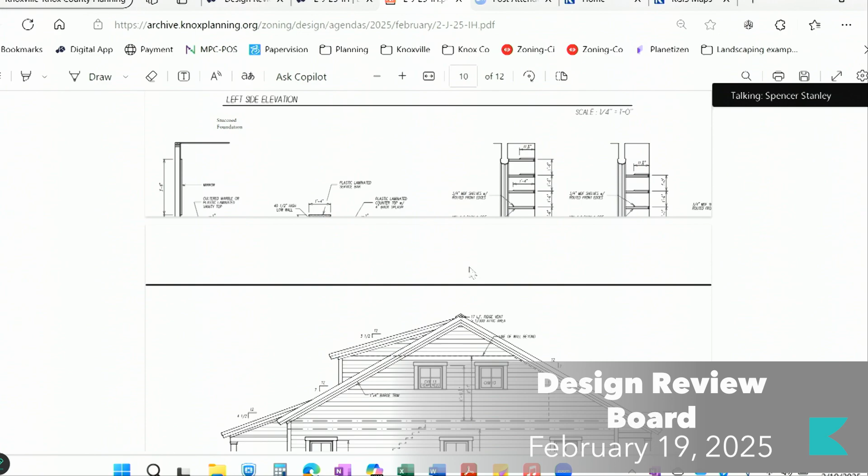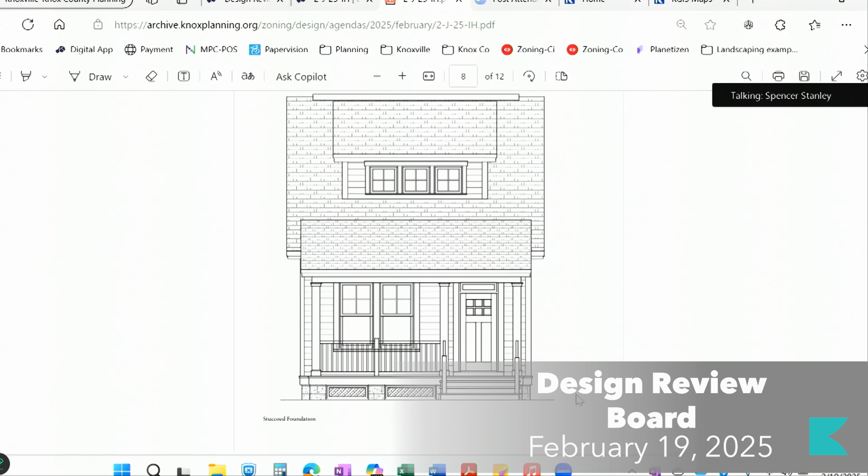And I wanted to propose, I have this exact same house, as far as the external appearance, just with a wider floor plan, and I would be willing to use that. It's 28 feet wide and 36 feet deep instead of this. There's another column on the front porch just to bridge the gap in the additional width. But otherwise, the external appearance is almost the exact same. And if we need to postpone, I understand, but that would be ideal if we could do the 28-foot plan.

That sounds like a promising solution, but I don't think we can approve something that we don't see in the application here today. I would probably shy away from it on a significant change like that.

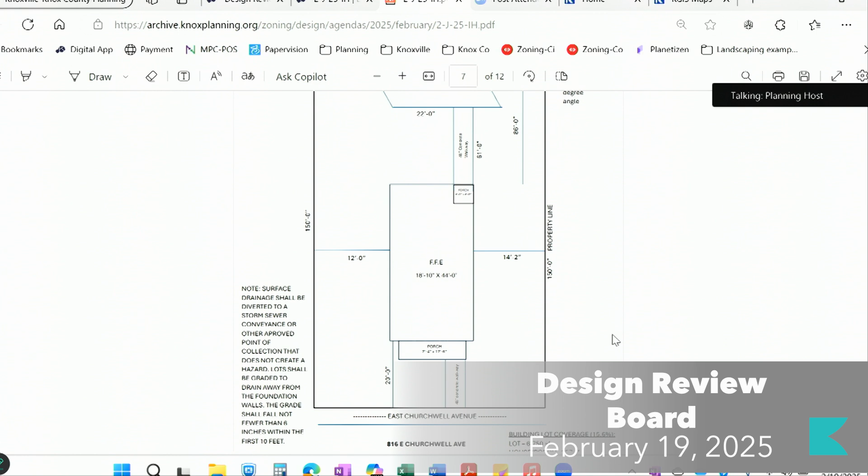I guess I have a question for the applicant regarding the slope of the property, and have you determined the foundation height? With a deep house like this on a lot that's rising up from the road, the front of the house could have a fairly substantial foundation. Have you studied that yet?

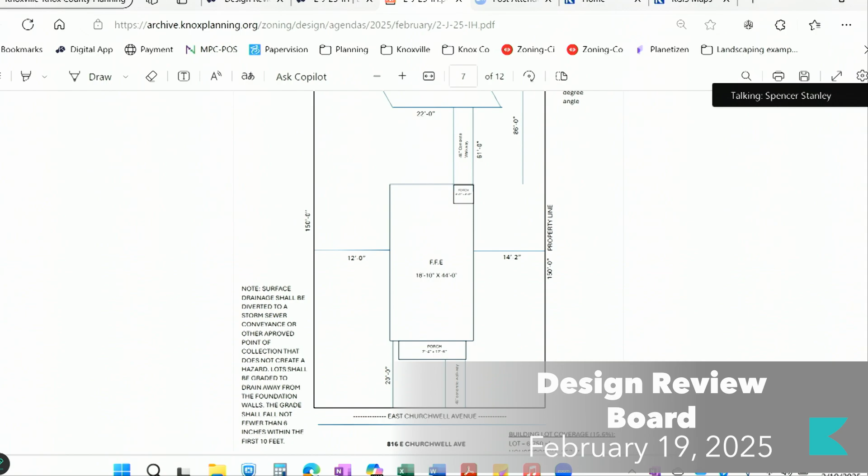Yeah, I agree. I'm expecting to be probably 4 to 5 block out of the ground is what I'm looking at right now. But of course, with the change in floor plan, the house that I'm looking at now is 36 feet deep, so I won't have to go into the back section as much, I don't think.

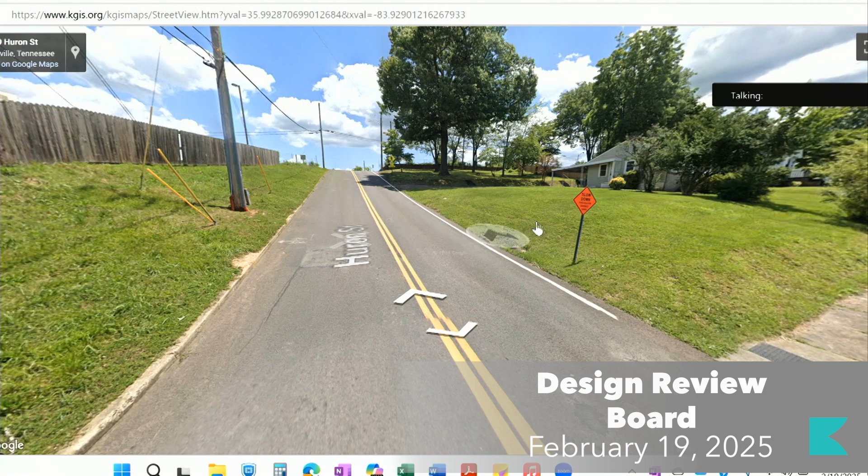The slope isn't, I mean, I've walked it several times and mapped it out, and I don't see a huge issue with that. Mike, if you go further up on this street view right here, that way.

How are you addressing that driveway? Is that through the property, or is that going to cease to exist? Oh yeah, that'll cease to exist. You said that will cease to exist? Yes, the one that's leading to the other house. I see, okay. Yeah, that has been, or it will be, taken out.

This is just kind of to help the board understand, but when they get the revised plans, this large tree that's in the rear yard, if you can note whether or not that's going to be retained or if it has to come down, it might be helpful. Sure, it should be retained based on the lines I've pulled and tape measure and stuff before, but yeah, I can note that on the plans.